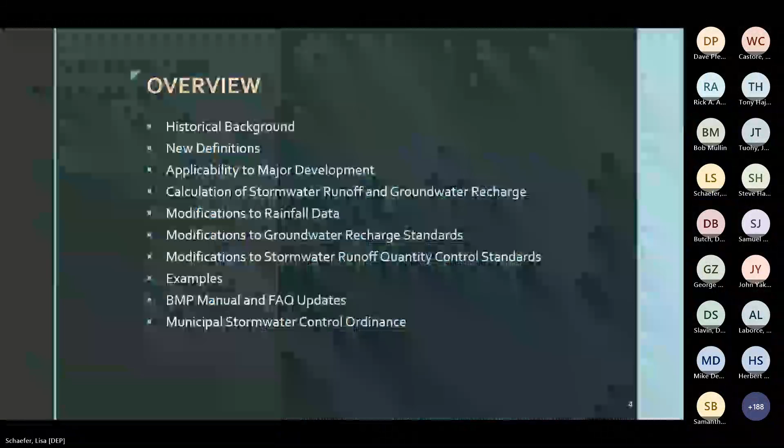First, this presentation will provide some of the history that led to the amendments, then I will cover the two definitions that have been added to the rules, and after that I'll go over the applicability to major development and discuss the legacy provisions, which are those projects subject to the prior rules under certain conditions. The legacy provisions will be followed by the change to the allowable calculation methods.

After that, there will be a longer discussion of the multipliers to be applied to modify NOAA's published rainfall data and how those multipliers are used in the calculations for groundwater recharge and stormwater runoff quantity control. After that will be some examples.

I will also briefly review the other updates that have been made to the BMP manual, the FAQs, and the Municipal Stormwater Control Ordinance, which we abbreviate as SCO. Lastly, we'll have a Q&A session before wrapping up.

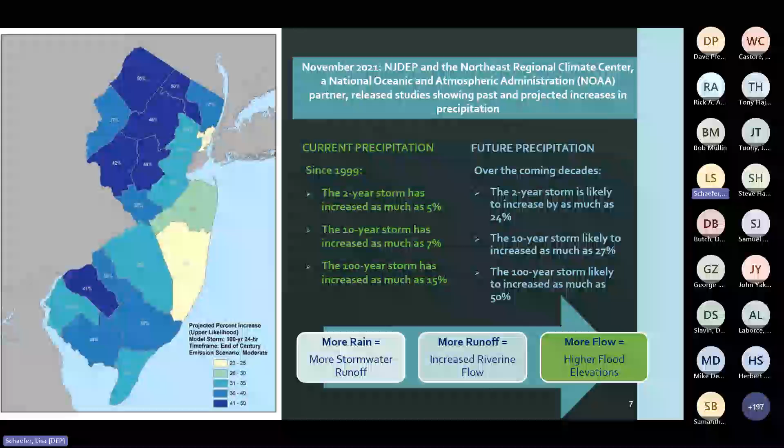The areas with the darkest shading in this graphic are anticipated to have 100-year storms that will increase between 41 and 50% by the end of this century. More rainfall means more runoff, which means larger discharges, and we will also see more flooding as a consequence.

Additionally, global warming increases both the energy in the atmosphere and the potential for more intense storm events. The science predicts that these storms will occur more frequently and at higher intensities than those of the 20th century. I'll cover this a little bit more in a little bit.

In many locations, stormwater runoff is often discharged off-site, and with the increasing intensity and rainfall depth, this will stress our infrastructure, such as bridges, roadways, and stormwater management systems, and will create further problems down gradient of the discharge points. This, in turn, increases risks to the inhabitants and properties.

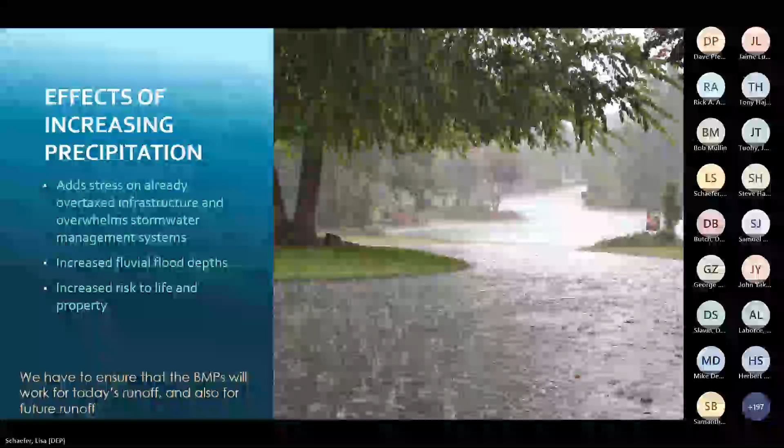Keep in mind, New Jersey is the most densely populated state, and most of the population centers are in the floodplain. So adding climate change on top of worsening flooding is just going to compound the issue and make things unsustainable.

NOAA's rainfall precipitation and intensity data, published in Atlas 14, Volume 2, or on NOAA's Precipitation Frequency Data Server, is essential to stormwater management designs. However, the precipitation depths and intensities were based on data collected from weather stations ending in the year 1999, meaning the design doesn't really reflect the precipitation we're experiencing today. Add to that runoff from older sites where there was no stormwater management, and the impacts worsen, potentially wiping out infrastructure and putting people in danger.

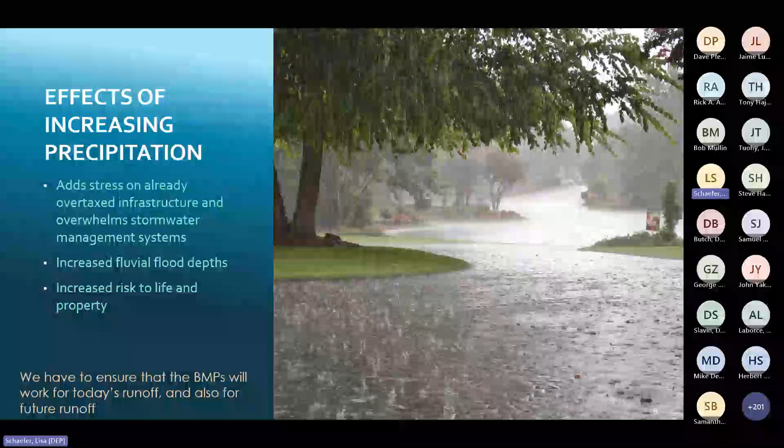Climate change will continue to bring more intensive rain in the future. A stormwater best management practice, or BMP, has a long service life, and BMPs designed in accordance with outdated rainfall data will become insufficient to handle the increasing precipitation depths and intensities. Therefore, there's a real need to anticipate the increase of precipitation depths due to climate change and use the predicted precipitation depths to design stormwater BMPs. The adopted rule amendments are what is required to address those impacts.

In the amended rules, there are two definitions that have been added regarding public transportation projects that are subject to the rules in effect prior to this rule adoption, which will depend upon when the public transportation projects achieved a certain status. First, by public roadway or railroad, we mean a pathway for use by motor vehicles or trains that is intended for public use and is constructed by or on behalf of a public transportation entity. A public roadway or railroad does not include a roadway or railroad constructed as part of a private development, regardless of whether it is ultimately to be dedicated to and or maintained by a governmental entity.

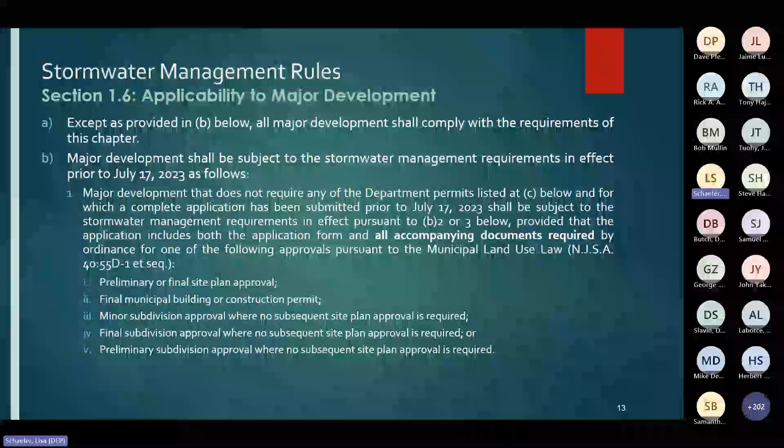Secondly, a major development project that does not require those permits listed in section 1.6C—which are a flood hazard area, freshwater wetlands, a CAFRA, a waterfront development, or a highlands permit from the department—and has submitted an application for the approvals listed in Roman numerals 1 through 5 prior to July 17th of 2023, will not be subject to this rule adoption.

A complete application means that the application submitted to the municipality has all of the required documents specified in the municipality's ordinance, and the municipality's reviewer considers the application complete for the review of the stormwater management design. Take note that the application and all accompanying documents shall include the documents for stormwater management. If the application submitted to the municipality for those approvals did not include the design documents for stormwater management, the legacy provision here will not be applicable.

Item 2 in this section establishes the timeframe for projects subject to the rules in effect on March 1st of 2021, provided it included all required materials I just discussed. Similarly, item 3 applies, except the rules are those in effect on March 2nd of 2021, the GI rules, and projects are also subject to the same conditions regarding items submitted.

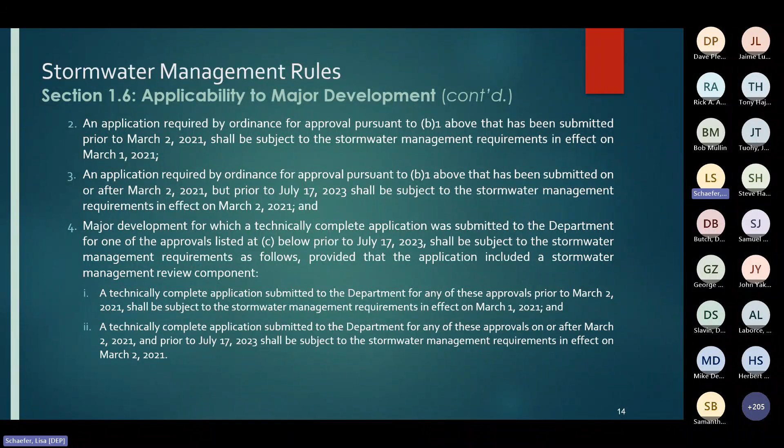Exemptions expire with the expiration, termination, or other loss of duration or effect of either the qualifying local approval or department permit, whichever comes first. The expiration of local approvals under B1 on the previous slide shall be governed by local ordinance. In the event there are multiple qualifying department permits under C, which I read previously, the expiration date is governed by that permit which expires last, provided that the permit is still in effect.

Once the exemption expires, the major development shall be subject to all requirements of this chapter upon reapplication for that permit, and all subsequent permits or local approvals under the municipal land use law. And there's one more citation for limits on these exemptions.

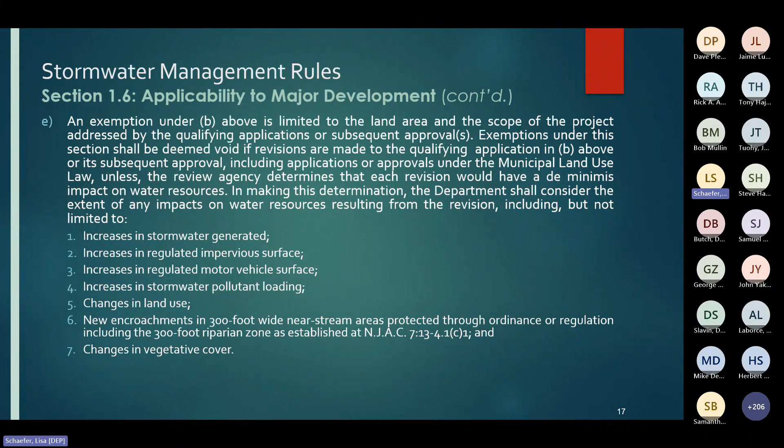An additional legacy provision exists for certain public roadway and railroad projects and is found at NJAC 7:8 under 1.6F. Public transportation entities must demonstrate that the project has determined a preferred alternative or has reached an equivalent milestone prior to rule adoption. The logic is that these projects have already undergone a significant level of planning and design, such that revising the project now to meet the rules would be a waste of public funds.

So next are 4 examples to help clarify the applicability portion of the rule adoption. To start off, I have 2 examples for projects where a department permit is required. For example, number 1, a non-residential major development submits an application for the department's Flood Hazard Area Control Act permit with the stormwater review component on August 1st of 2023 and is deemed technically complete.

The non-residential major development also submits an application to the township for a preliminary site plan approval on August 1st of that year, but the township's stormwater control ordinance is still in alignment with the rules in effect prior to the July 17th, 2023 amendments. What rules and SCO are applicable to this non-residential major development?

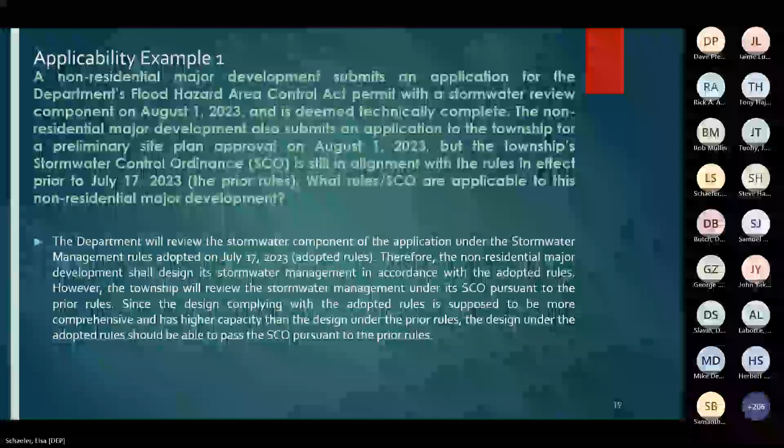Well, the department will review the stormwater component of the application under the adopted rules. Therefore, the non-residential major development shall design its stormwater management in accordance with the adopted rules. However, the township will review the stormwater management under its SCO pursuant to the prior rules. Since the design complying with the adopted rules is supposed to be more comprehensive and has a higher capacity than the design under the prior rules, the design under the adopted rules should be able to pass the SCO pursuant to the prior rules.

For the second example, a non-residential major development submits an application for the department's flood hazard permit with the stormwater review component on June 1st, 2023, and it too was deemed technically complete. The non-residential major development also submitted an application to the township for a preliminary site plan approval on December 1st of 2023. By this time, the township stormwater control ordinance had been amended to be consistent with the rules adopted on July 17th of 2023. So which rules or SCO are applicable to this non-residential major development?

Well, the department's going to review the stormwater component under the prior rules. However, the non-residential major development will need to redesign its stormwater management to comply with the township's SCO pursuant to the adopted rules.

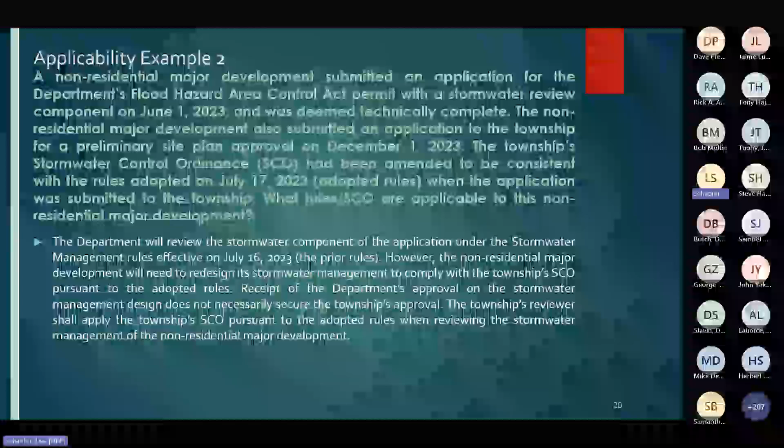Receipt of the department's approval on the stormwater management design does not necessarily secure the township's approval. The township's reviewer shall apply the township's SCO pursuant to the adopted rules when reviewing the stormwater management of the proposed project. So this example is different. In this case, the permit came into the department before the rule adoption, but the project wasn't submitted to the municipality until later that year, and by then the municipality had updated its SCO.

Now, two examples in which a department permit is not required. Example 3: a non-residential major development submits an application to the township for preliminary site plan approval on December 1st of 2023, but the township's SCO is still in alignment with the rules in effect on July 16th of 2023. The project will not require any of the department permits listed under subsection 1.6C in the stormwater management rules. Is the project subject to the amended stormwater management rules?

The township will review the stormwater management under its SCO pursuant to the prior rules, provided the submittal includes all of the required documents prior to the township amending its SCO pursuant to the July 17, 2023 amendments made to the stormwater management rules. So pursuant to the requirements of the MS4 permit, the township must revise its SCO to align with the amended rules and have it be in effect within one year of the rule adoption.

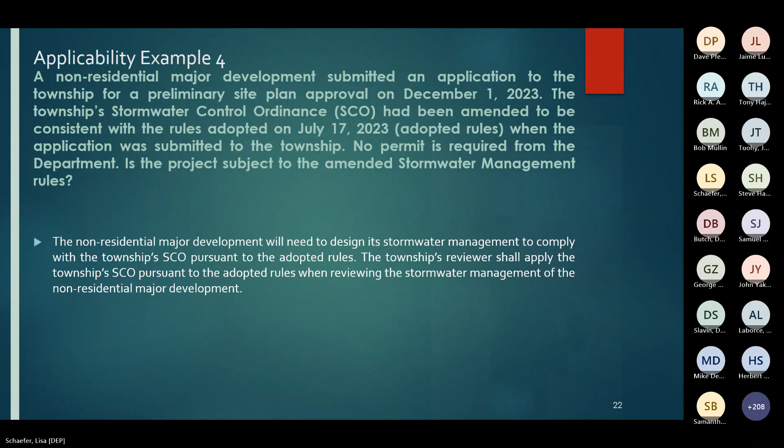Next up is the amendments for subchapter 5, which is the design and performance standards for stormwater management. Going forward, this red stripe is specifically for subchapter 5 of the stormwater management rules. There are no changes to subsections 5.1, 5.2 stormwater management measures for major development, 5.3 green infrastructure standards, 5.5 water quality, 5.8 maintenance, or 5.9 technical sources, but I'm going to handle the remainder of the subchapters out of order, starting with 5.7, the computational methods, as this impacts the remaining subsections I've yet to discuss.

So there is a change in the allowable computation methods, namely only the NRCS methodology is found in the adopted rules. That means the NRCS methodology must be used when calculating the water quality design storm.

Throughout the remainder of this presentation, I'm going to do my best to give you the page in the BMP manual, and this information is included under item 13 on page 32 of chapter 5 in the BMP manual.

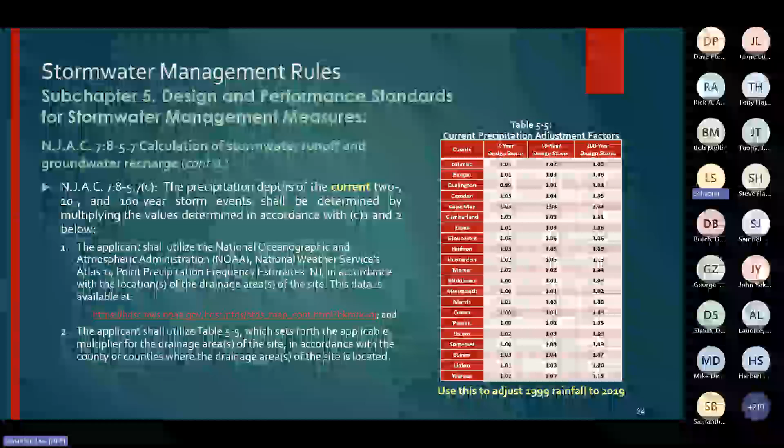The first example I will present illustrates the calculation of the current precipitation rainfall depth for a site. If you aren't familiar with using the NOAA PFDS, start on page 12 of the revised Chapter 5 in the BMP manual published last July.

For a site in more than one county, you multiply the rainfall depth from the first area by the county-specific current precipitation adjustment factor for the design storm you're looking at, then multiply that product by the percentage of the total area lying in that first county. Repeat this for the second area, using the current precipitation adjustment factor for the second county for the same design year storm, then multiply that product by the percentage of the total area located in the second county. Then sum those two to get the current adjusted total rainfall depth for that design storm.

Chapter 5 in the BMP manual has an example, numbered B-1, found on page 18, which depicts a site situated in two counties.

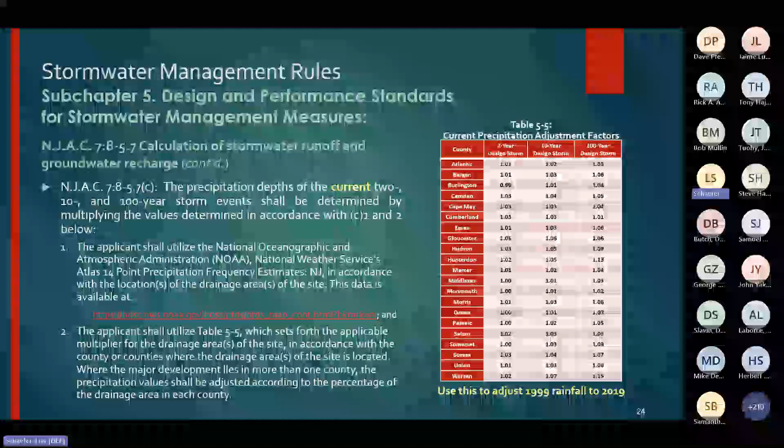I mentioned the PFDS data, but you can also use the county 24-hour rainfall data from the NRCS, and then apply the current precipitation adjustment factor from Table 5-5 in the rules. The county-specific 24-hour rainfall frequency data published by the NRCS in the 2012 Engineering Field Handbook is reprinted as Table 5-1 on page 15 of Chapter 5 in the BMP manual.

There's a second multiplier required in the rule amendments. Applying the future precipitation change factors to the published NOAA rainfall data allows us to look ahead to the period from 2050 through 2099 to address the future impacts of climate change.

The precipitation depth we should use for the projected 2-year storm for the same project located in Warren County is 120% of the depth listed on the NOAA PFDS for the 2-year storm. For the projected 100-year storm in Warren County, the rainfall depth is adjusted to 137% of the 100-year rainfall depth found on the NOAA PFDS.

For a site located in more than one county, it's the same method as before, but using the future projected change factors from this table. You multiply the rainfall depth from the first area by the county-specific future precipitation change factor for the design storm specified, then multiply that product by the percentage of the total area lying within the first county. Repeat this for the second area using the future precipitation change factor for the second county for the same design storm, then sum these products to get the future projected total rainfall depth for that design storm.

Don't worry, I'll have examples. So let's move on.

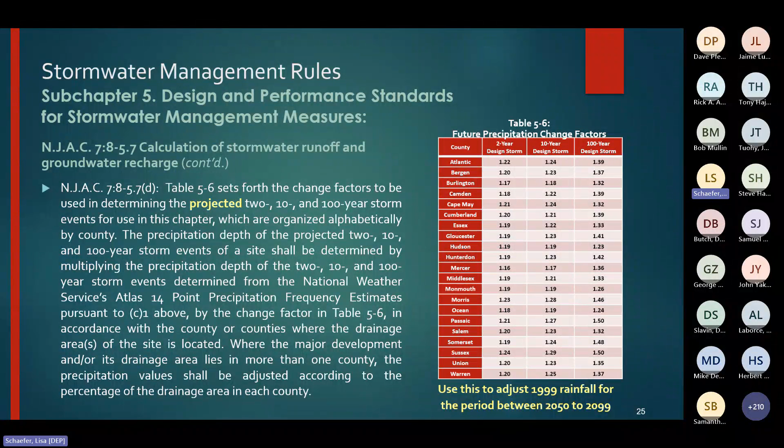We also have to talk about time of concentration calculations, as the equation uses the rainfall depth resulting from the 2-year design storm event. Although how to calculate the travel time of runoff in sheet flow is not explicitly stated in the rules, it's because the rules require using the current and projected 2, 10, and 100-year storm events in the stormwater calculations. The 2-year storm event used in the calculation of travel time of sheet flow shall also use the current and projected 2-year storm events respectively.

Time of concentration for the current storms will use the current rainfall data, meaning you multiply the NOAA rainfall depth for the 2-year storm by the current precipitation adjustment factor. However, for projected storms, multiply the rainfall depth for the 2-year storm by the future precipitation change factor. If you're dealing with very small areas, there won't be much difference, but there will be for larger drainage areas.

One other thing I must mention is that the rainfall depth of the 2-year storm, P sub 2, used in the calculation of the time of concentration for the water quality design storm, is based on using the projected 2-year storm event. It's a lot to remember. All of this information is found on page 25 of Chapter 5 in the revised BMP manual.

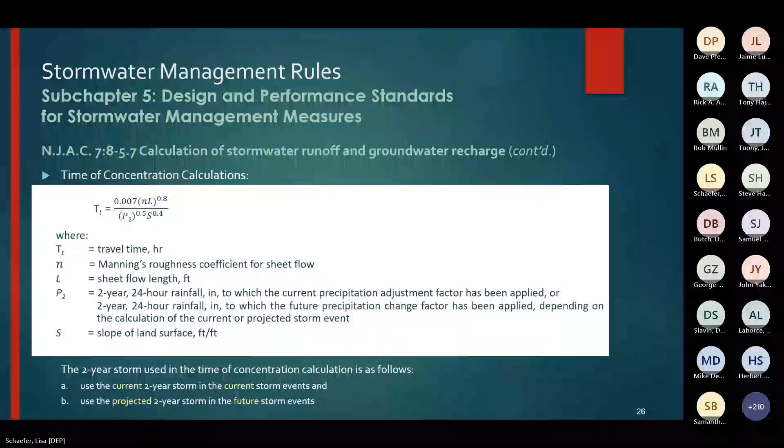Okay, so now that I've explained what the rules mean by a current or projected design storm, we can go back to subchapter 5.4 in the rules. So for groundwater recharge, the rules allow you the option, pursuant to NJAC 7:8-5.4B1 Romanette 1, to address the loss of recharge on an annual basis, and that is done through the use of the groundwater recharge spreadsheet.

Nothing changed for this option. However, if you're going to infiltrate the difference between the pre and post construction runoff volumes, you must do so as required under the second option, using the projected 2-year design storm. Remember, the projected 2-year storm uses the future precipitation change factors found in table 5-6, in the column for the 2-year storm. So, in other words, the design looks at what would happen if nothing on the site changed versus what the site changes are proposed and their impacts at 2019 and in the future.

Okay, for these, you may find that examples 5.6, 5.7, and 5.8 in chapter 5 of the BMP manual are helpful on this subject. One other thing is that chapter 6 of the BMP manual has been updated to match the rule adoption.

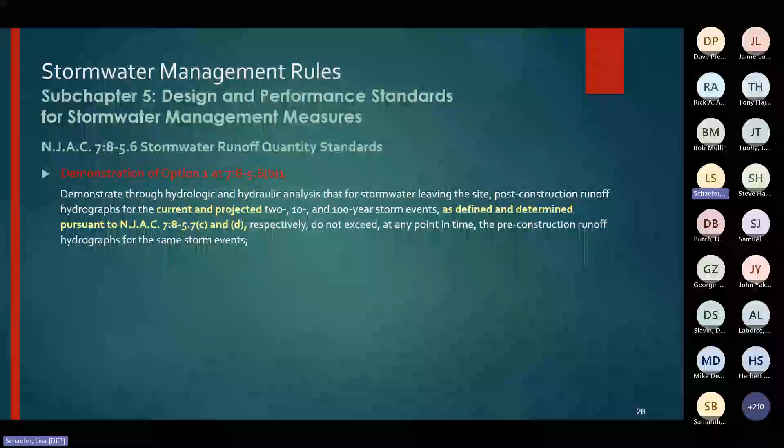Okay, now for the stormwater runoff quantity standards, which are found in subsection 5.6 of the rules. There are 3 options from which to select in order to demonstrate compliance with the requirement to control stormwater runoff quantity impacts. Under the bullet is the rule text for the first option to demonstrate compliance with the stormwater runoff quantity standards. Note that the bold or yellow text is the portion of the rule that has been amended in the adopted rules. Remember, section 5.7C was covered on slide 25 and 5.7D was covered on slide 25 respectively. The bolded text will be discussed after we look at the other options for demonstrating stormwater runoff quantity control compliance.

Okay, so regardless of which option is selected, the quantity control calculations required will have to include an analysis of runoff volumes produced for both the current and the projected design storms. So you will review the pre-construction, aka existing conditions, and what's proposed using the rainfall data to which the current precipitation adjustment factors are applied, to do your comparison using numbers that reflect what was precipitating in 2019. You also have to review the pre-construction conditions and what's proposed using the rainfall data to which the future precipitation change factors are applied, to do your comparison using numbers that will reflect what will be happening from 2050 through 2099. That way, your review checks that the designs work for what's currently precipitating and what we can expect will precipitate due to climate change.

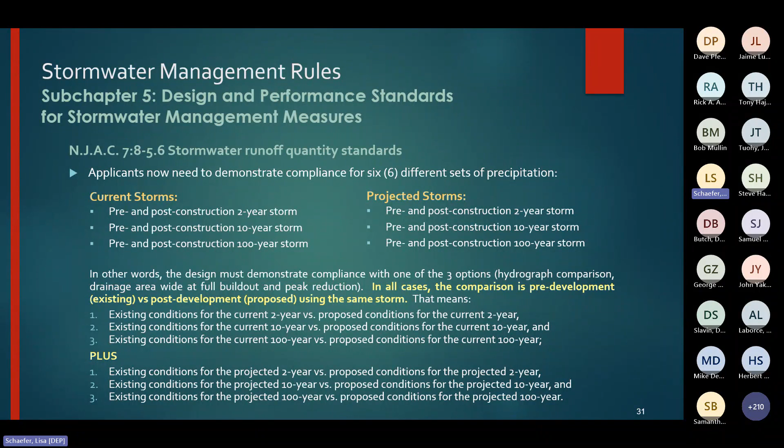If you recall, I covered the time of concentration calculations on slide 26, but they also come into play here. So if you're using modeling software to design or to review the accuracy of designs, you may want to create a model for the projected storms that is separate from the model for the current storms, because of the different rainfall depths. You may also want to look at page 84 in chapter 5 of the BMP manual, which has the updated summary of modeling guidance.

We first go to the website found at the link shown. In the data description section, from the data type drop-down menu, make sure precipitation depth, rather than precipitation intensity, is selected as shown on the left. Similarly, for the time series type, ensure partial duration has been selected from the drop-down menu.

Next, in step B, under the select location option, manually enter the location using one of the options offered on the screen, or use the map to locate the site, making sure to zoom in. We're looking for Trenton Station 2.

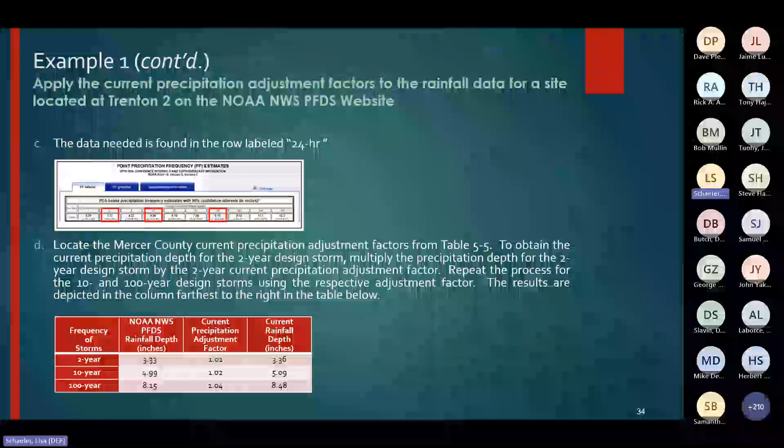Repeat the process for the 10 and 100-year design storms using the proper adjustment factor. That's how you get a 10-year current rainfall depth of 5.09 inches and a 100-year current rainfall depth of 8.48 inches, as depicted in the column farthest to the right in the table.

If you aren't familiar with using the NOAA PFDS, start on page 12 of the revised BMP manual, chapter 5, published last July, for more details.

For the next example, when a site is situated in 2 counties, the method is to obtain the current adjusted rainfall depths for each of the 2 counties and then weight average them based on the area of the site in its respective county. Here the site is located on the county line shared by Middlesex and Mercer counties. 1/3 of the site is in Middlesex and the remaining 2/3 is in Mercer County.

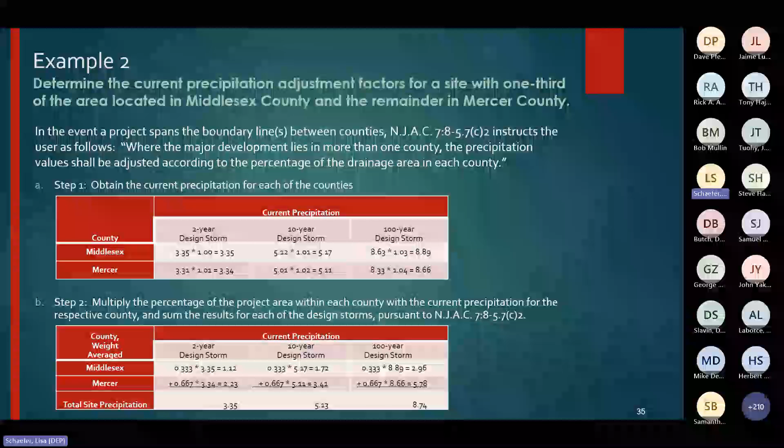In step A, we obtain the NOAA data and the current precipitation adjustment factors and calculate the rainfall depths for each of the design storms for each of the counties. Then, as shown in the second table, we multiply the percentage of the project area within each county by the current precipitation for the respective county from step A, and sum the results for each of the design storms. The final current precipitation depths are in the bottom row of the lower table.

This example provides a scenario showing noncompliance with the requirements when the proposed development reduces the regulated motor vehicle impervious surface and increases the slope of the surface.

Often for redevelopment projects, a designer would choose the option at NJAC 7:8 5.6B1 to demonstrate compliance for quantity control, that for stormwater leaving the site, post-construction runoff hydrographs for the current and projected 2, 10, and 100-year storm events, as defined and determined pursuant to NJAC 7:8 5.7C and D respectively, do not exceed at any point in time the pre-construction runoff hydrographs for the same storm events.

For a site located in Trenton, which is Mercer County, an approximately 2-acre paved parking lot is to be redeveloped as an office complex consisting of a new building, a parking lot, and landscaping. The existing lot has a slope of 1%. The redeveloped site will be regraded to a 5% slope for better drainage. The landscaped area will not receive runoff from the impervious surfaces. Hydrologic soil group C soils are present.

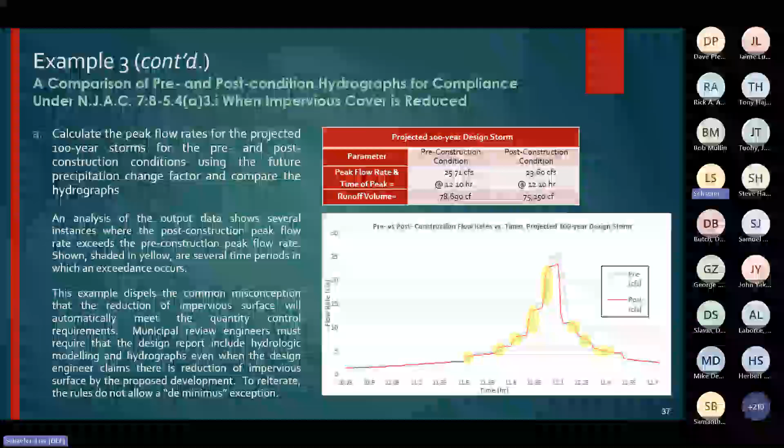A summary of the results from the modeling software is shown in the table. To correctly calculate the time of concentration, first P sub 2 was calculated by multiplying the NOAA rainfall depth for the 2-year storm of 3.3 inches with the future precipitation change factor of 1.16 for Mercer County, and P2 is found to be equal to 3.86 inches.

Here in the table is the summary information, and it looks like the results for the post-construction condition are less than that for the pre-construction values.

Next, the modeling software produces hydrographs with the peak flow rates and time intervals exported as data for input into a spreadsheet to create a chart.

Although it's not shown here, at first glance the hydrographs seem to show compliance, meaning the post-construction volume looks like it is less than that for the pre-construction condition.

We would think that the post-construction hydrograph would be completely under the pre-construction hydrograph. However, when we look at the data, we find that this is not the case.

A zoomed-in view of the pre- and post-condition hydrographs are provided on the slide. So even a reduction in impervious cover should be reviewed to check that adjustment or change factors have been correctly applied to the appropriate storm calculations, and the data itself examined instead of the hydrographs, to confirm that there are no exceedances. You would similarly inspect the data for the other projected and all of the current design storms to look for other instances where the post-development hydrograph exceeds the pre-development hydrograph.

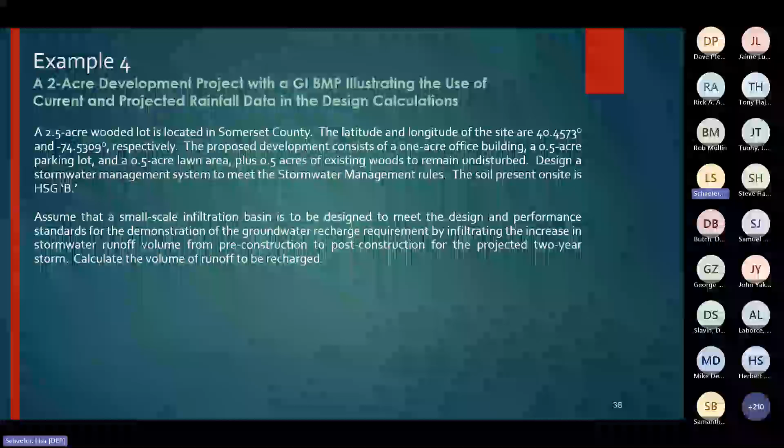This example provides a scenario showing the groundwater recharge calculations. Here, a 2.5 acre wooded lot is located in Somerset County. The latitude and longitude of the site are 40.4573 degrees and negative 74.5309 degrees respectively. The proposed development consists of a 1 acre office building, a half acre parking lot, and a half acre lawn area, plus half an acre of existing woods to remain undisturbed.

We're going to design a stormwater management system to meet the stormwater management rules. The soil present on site is HSG B. So we're going to assume that a small-scale infiltration basin is to be designed to meet the design and performance standards for the demonstration of the groundwater recharge requirement, by infiltrating the increase in the stormwater runoff from pre-construction to post-construction for the projected 2-year storm, and we're going to calculate the volume of runoff to be recharged.

I'm going to skip the parts of the design calculations because I just want to focus on the groundwater recharge requirement. So for this site, I've included the NOAA rainfall depth, the future precipitation change factor for Somerset County, and the depth of precipitation for the projected 2-year design storm.

With a precipitation depth of 3.93 inches, the projected 2-year design storm will produce an increase in runoff volume for the post-construction condition, which is 17,886 cubic feet, as shown in the lower table. To comply with the rule requirement, this is the target that the design must achieve, provided everything else is designed in accordance with the BMP manual.

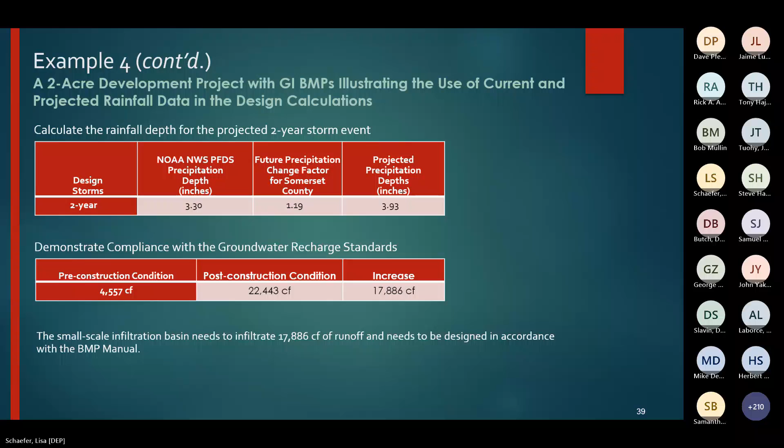The fifth example is sizing a manufactured treatment device using the NRCS methodology, since we can no longer use the rational method and modified rational method for stormwater calculations. This example will walk you through what is now required.

We're going to calculate the peak flow rate for sizing an MTD to treat the water quality design storm from a quarter acre impervious motor vehicle surface. The parameters that apply are we have an area of a quarter acre. Our slope is 5%. We use a CN value of 98 since it is 100% impervious.

We've determined that our projected 2-year rainfall depth is 3.84 inches. And we also need to note that the hydraulically most distant point to the inlet of the MTD for our site is 110 feet.

When using the NRCS methodology, you need to calculate the time of concentration, for which we follow the method covered in example 5-1 of chapter 5 in the BMP manual. That example begins on page 33, and it's also the formula stated on slide 27.

As I said earlier, we use P2 for the projected 2-year storm in the TC calculation that we use for our water quality design storm. However, there won't be much difference if we mistakenly use the current 2-year storm for P2, given that we're only dealing with a drainage area of a quarter acre.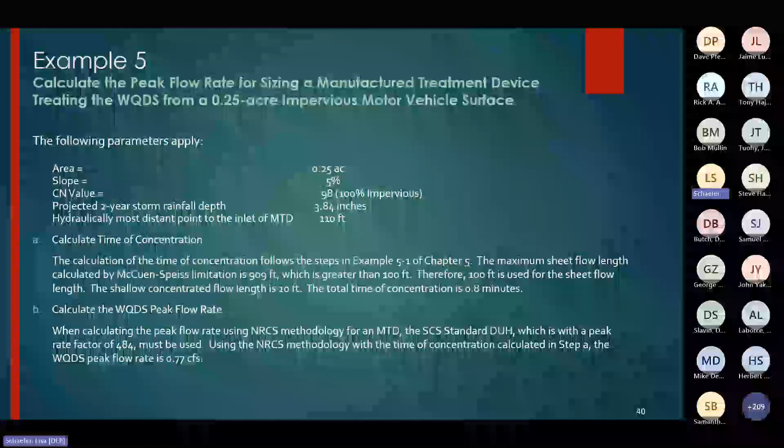However, the maximum sheet flow length should not exceed whichever is shorter, meaning the 100 foot limitation or the McCuen-Speiss value. So we use 100 feet, since 909 is way too long.

For our stated flow path length of 110 feet, we have 100 feet as sheet flow, which leaves 10 feet of shallow concentrated flow. Plugging that all in, T sub C is calculated to be 0.8 minutes.

We also have to use the SCS Standard Dimensionless Unit Hydrograph with a peak rate factor of 484. This is covered on page 27 of Chapter 5 of the BMP manual. With all of this together, the modeling software calculates that the peak flow rate for the water quality design storm is 0.77 cubic feet per second.

The next thing to do is determine the size of the MTD. The selection of a specific MTD model listed on our webpage is based on the maximum treatment flow rate, or MTFR, for a hydrodynamic type MTD, or the maximum allowable drainage area evaluation method and the MTFR evaluation method per the certification letter for a filtration type MTD.

Go to chapter 9.5 for green infrastructure MTDs, and go to chapter 11.3 for MTDs that are not certified as green infrastructure for this calculation.

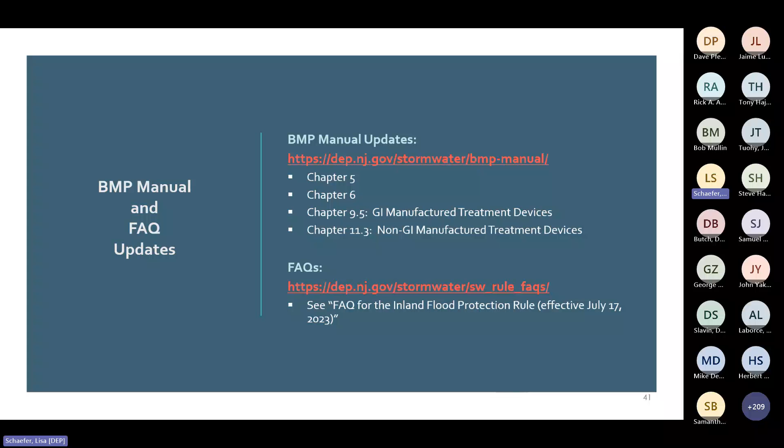The FAQs have been expanded to address various issues, some of which have been mentioned on the earlier slides. The newest FAQs are at the bottom of the web page, above the blue footer. Just look for the rule adoption date and click on a question, and it will expand to show the answer.

Now, the updates to the Stormwater Control Ordinance align with the rule adoption. They can be downloaded from our website in Word or PDF formats.

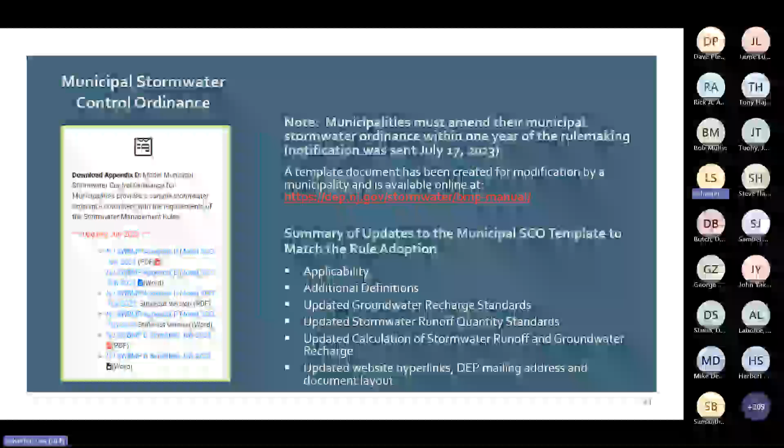On the left is a screenshot from the updated website showing all of the different types of items available to download. There's a clean copy, plus there's a strike-through version to illustrate where text has been removed, and for those, the new text appears in red.

And then there's the simplified version, which just cites subchapter and section numbers from the stormwater management rules instead of the full text, to reduce or eliminate the need for municipalities to revise their ordinance when the stormwater management rules are amended. A municipality has to comply with the applicable laws and procedures for passage and adoption of ordinances pursuant to this simplified version.

Reminder: municipalities must amend their stormwater control ordinance within 12 months of written notification by the department of the need for modification and update. Notification was sent on July 17th of 2023, and as I said before, we're getting pretty close to that deadline.

On the lower part of the slide is a summary of the updates made to the SCO that match with the rule adoption, just so you can tick them off in your mind. We've also updated the hyperlinks throughout the documents and cleaned up their appearance.

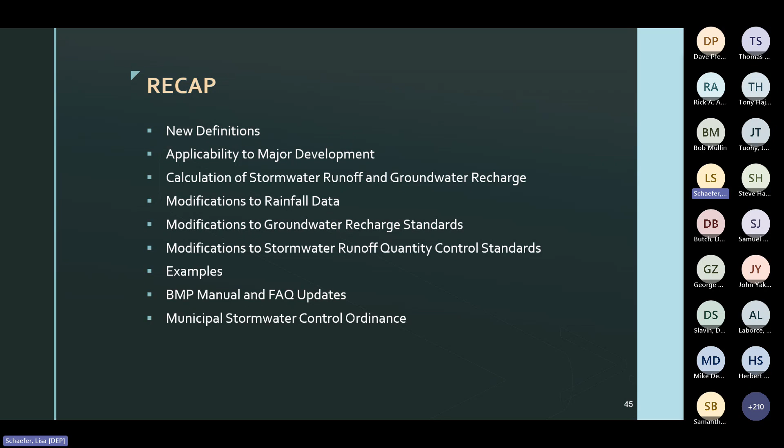Please continue to periodically check our website for updates to the manual and other stormwater related material. If you're not seeing the July 2023 date on the page or something more current, you need to refresh your browser.

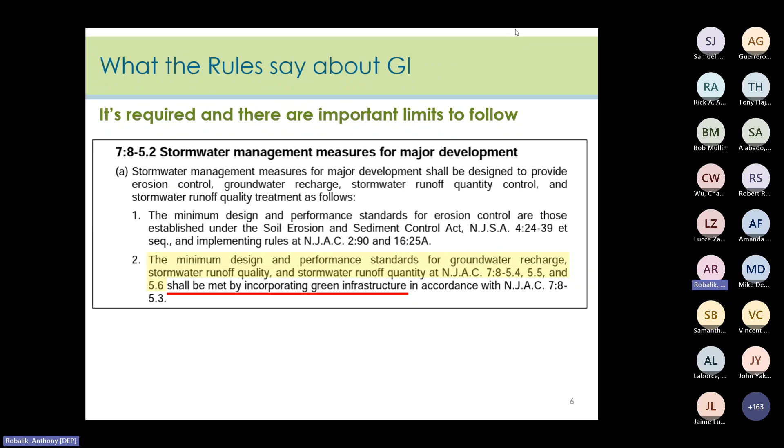BMPs listed under Table 1 are identified as GI. Table 2 is GI, requiring a waiver or variance if used for other than quantity control. Table 3 are non-GI BMPs. But this is just a review of what was covered back in Module 1 in the overview presentation. The tables also have important notes and footnotes that should not be overlooked, and if you need help understanding them, please feel free to contact us.

So the takeaway from this is that the rules require a project to meet the design and performance standards using GI, meaning usually Table 1 BMPs will be used as they satisfy all of the requirements. But Table 2 BMPs, as covered earlier, can be used to address stormwater runoff quantity control, and when used for the other design and performance standards, Table 2 BMPs require a waiver or variance. Table 3 BMPs are not considered GI, and therefore will require a waiver or variance to meet any of the design and performance standards.

Okay, so what is meant by a contributory drainage area? Subchapter 5.3 is where the rules identify which of the GI BMPs have fixed contributory drainage area limits. A contributory drainage area is defined in the rules as the area that drains to a stormwater management measure, excluding the area of the measure itself.

So on the fact sheet below the first paragraph on page 1, these limits are restated. Take note that the GI BMPs found in Chapter 9 of the BMP manual are not listed here, as they have one or more design components that limit the size of the contributory drainage area. For example, grass swales have size constraints and a maximum depth of flow limitation of 2 inches, and this design criteria will impact how much area can drain to a given grass swale.

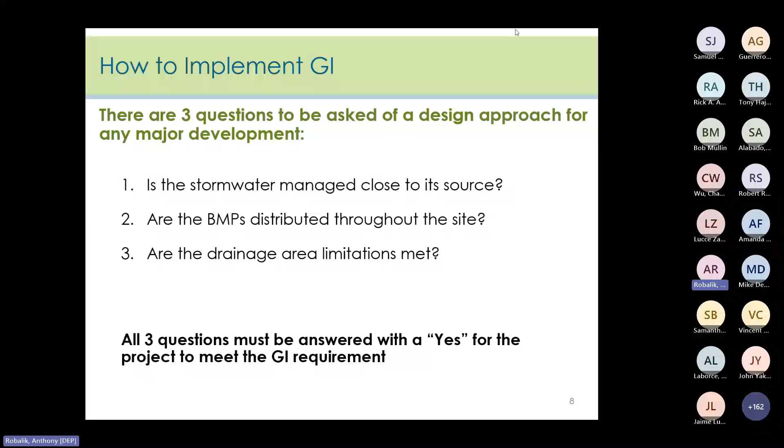That is, stormwater must be managed close to its source, the BMPs used must be distributed throughout the site, and any BMP drainage area limitation must be met, and the reviewer will confirm that the answers to all 3 of these questions are correct. So let's go through these questions individually.

So this is an example of placing BMPs close to the source of runoff. And here's the project description. We have a fully impervious 3-acre site in an urban redevelopment area, and it's proposed to be redeveloped again.

However, due to the proposed GI practices, the project breaks up or disconnects the flow of runoff over impervious surfaces and provides low maintenance landscaping that encourages retention and planting of native vegetation that minimizes the use of lawns, fertilizers, and pesticides. So in this example, all stormwater runoff generated by the redevelopment is managed close to its source. So we can answer with a yes to that first question on the GI fact sheet.

So the next question to be asked is if the GI BMPs are dispersed throughout the site. The previous site was certainly a good example of spreading BMPs throughout the site, and this is another one. The parking stalls shown here are actually pervious pavement, and they are separated by traditional impervious pavement aisles graded to direct runoff to the pervious areas.

Roof runoff also drains to the subsurface storage beds below the pervious pavement parking stalls at either end without exceeding the drainage area limits. And so we can answer yes for this site as well.

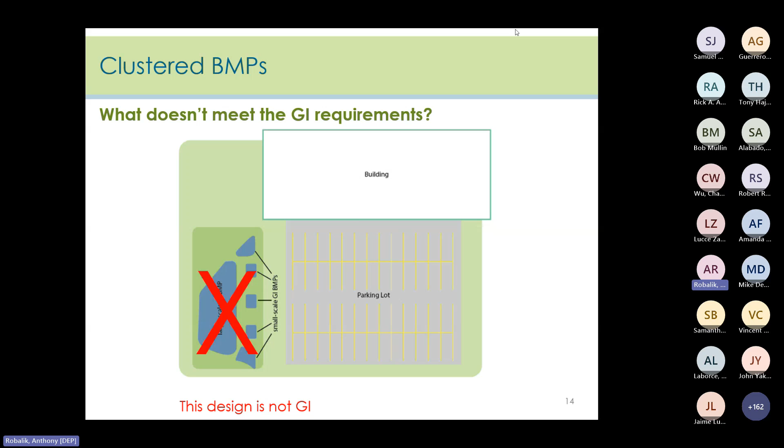Okay, and the last question to be asked is whether the contributory drainage area of the proposed GI BMP is less than or equal to the limitation found in the rules at 7:8-5.3.

Small scale bioretention basins are ideal for use in parking lot islands and where grass strips at the edges of parking areas or roadways were typically used in the past. The drainage area limit for a small scale bioretention basin is 2.5 acres, which generally is more than enough.

All right, so with that, that's going to conclude our GI fact sheet portion of the presentation. Next, we're going to be reviewing a plan review example that focuses on using green infrastructure.

The goals of this part of the presentation are listed here. However, we will focus on green infrastructure. For this example, we'll look at what was proposed and identify if and where the design falls short.

All reviews require figuring out which standards apply and then checking them for compliance. Questions we must ask and answer are: what is the disturbance on site? Does it trigger major development? Will the project be required to do water quantity, groundwater recharge, water quality? And are there infiltrating BMPs being proposed, which would require groundwater mounding?

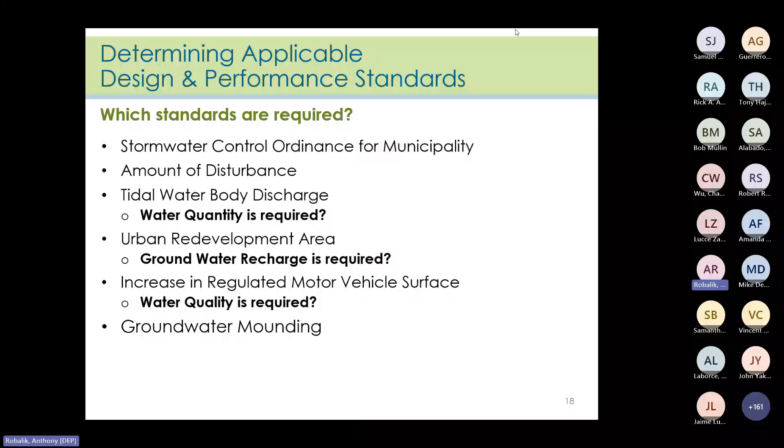We will need to figure out all of that to see if they will apply in this review and how they will be addressed using green infrastructure. So it's important to know what the site looks like, what the pre-construction conditions are, and what the existing land cover is. Plus, we need to take a look at soil testing information.

Let's take a look at what's going on in our example. The property in question is a farm that had been such for a number of decades. The site is over 18 acres. The road running east to west at the front of the property is a county route with sizable traffic volumes. The property is adjacent to some forested properties along the back lot line, which is also a stream corridor.

And the property drains towards the stream, which flows to the south before crossing under a roadway east of the property via a culvert.

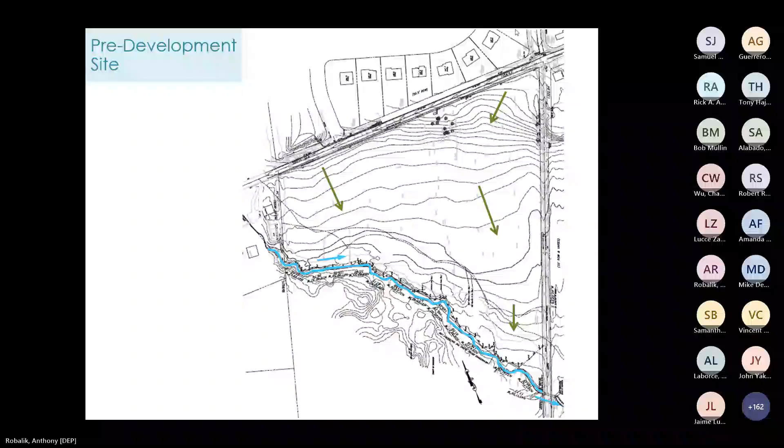The proposed development includes the clearing and grading of the property, construction of 25 single-family homes, widening of the existing road found on the right side of the plan, and adding another internal road. Both roadways will be constructed with 6-inch curbs and will each end in a cul-de-sac.

The stormwater management report indicated 4.7 acres of impervious cover is proposed, without a breakdown into which is motor vehicle surface and which is rooftop surface. And that breakdown is important with the current rule.

So we can start by checking the coverages. Each of the homes is about 0.35 acres on average, which totals to 8.75 acres in total. The proposed roadways are 28 feet in width, ending in a 50-foot radius cul-de-sac.

So that ends up being roughly 70,000 square feet, or 1.6 acres, of new motor vehicle surface proposed. Additionally, the existing portion of the roadway along the east side of the property will be newly collected where no collection system existed before, so it also counts towards that net increase in motor vehicle surface. We can safely say that these totals exceed the threshold for major development, and so this is a major development.

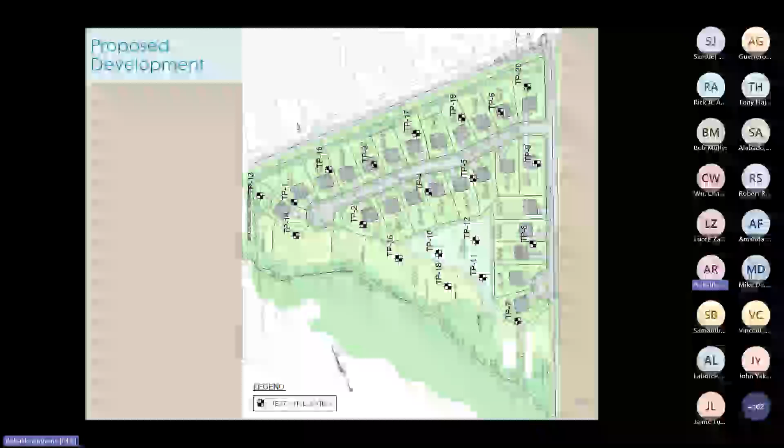First, let's look at the soil exploration map, which indicates that a number of test pits were completed. Although at the time this plan was prepared, only one central stormwater management basin was anticipated, as shown in the center of the site, and that's probably due to the preliminary concept predating the current stormwater management rules.

As we know, major development projects are required to use green infrastructure best management practices, which are smaller in scale and treat stormwater runoff close to the source. So it's good that the designers realized the single basin approach wasn't compliant and went with multiple BMPs.

The reviewer would also want to check that for the revised design, the proper number of test pits and soil borings were performed. In this case, the soil testing report was not revised to meet the testing location requirements for the updated basin layout.

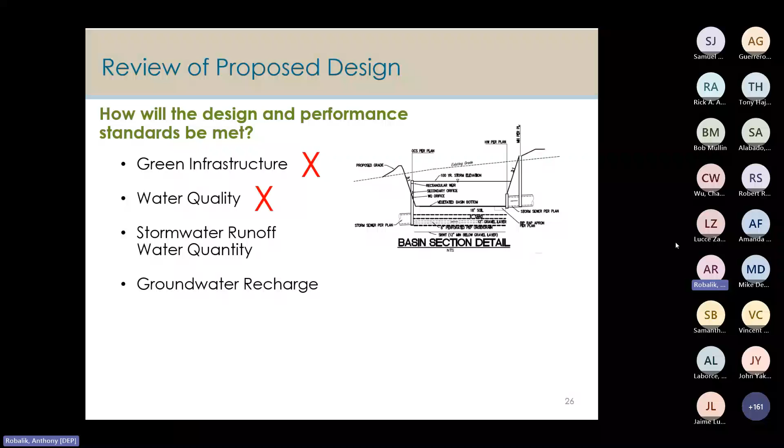Next point, the stormwater calculations prepared in 2022 used the Type III rainfall distribution for the 2, 10, and 100-year design storms. As per the 2021 publication in Chapter 5, the NOAA C or D distribution should have been used. So that will also go into the review letter, and new calculations would be required. This site, as is, would not meet the runoff quantity control standard until that correction is made.

For groundwater recharge, the report states that the project demonstrates compliance with subsection 5.4 of the rules because all of the runoff is collected and infiltrated. That statement is false with respect to the current design. It may have been true for an earlier iteration of the design.

So the project will have to be revised along with the narrative, and also no further detail is provided in the report on meeting the groundwater recharge requirement. Another thing to add to the review letter is a reminder that if the design were actually infiltrating runoff into the underlying soils, then a groundwater mounding analysis would also have to be included.

So in summary, this presentation covered what is meant by green infrastructure, or GI, which I'll state again here, is a stormwater management measure that manages stormwater close to its source by either treating stormwater runoff through infiltration into subsoil, treating stormwater runoff through filtration by vegetation or soil, or storing stormwater for reuse. The fact sheet was created to help the public better understand GI and how to implement it, along with examples of situations that are considered as not meeting the definition of green infrastructure.

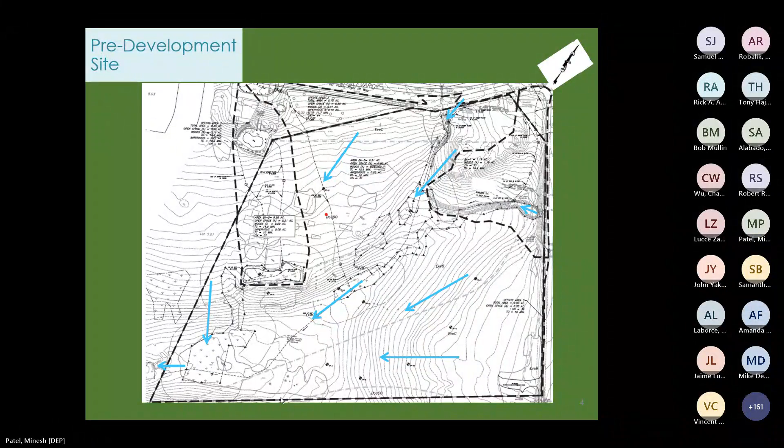The proposed development includes the clearing and grading of the property. There will be construction of 152 age-restricted affordable housing units in a single multi-story building, a single access driveway, surface level parking, and multiple stormwater basins that will discharge to the southwest corner of the property to support the existing drainage patterns.

The project will be constructed in 2 phases. The first will include 84 units, and the second will be 68 units, which are located on the left side of the building as shown.

From the stormwater management report, the narrative states there are 3 small-scale infiltration basins along the southern border that are designed to provide extended detention of the larger design storms, plus a northeast detention basin for the off-site runoff entering the site to the north and the east.

Immediately, there is a big issue with this design. All 3 of the basins that are proposed to meet the GI requirement are grouped at the southern side of the project. So clustering these BMPs together is not compliant with the GI requirements. Remember, the BMPs have to be distributed throughout the site and manage stormwater close to its source.

The brown shaded rectangles denote results for other test pits. For test pits number 3 and number 5, groundwater was encountered at 5.5 feet below existing grade. For test pit number 6, groundwater was found at 6 feet below grade. And lastly, a perched water table was found for test pit number 8 at 8 feet below grade. As with the blue shaded test pits, groundwater was not encountered at the ones I did not call out.

But the report shows quite a variation in the test results for permeability. So let's look at the table of the testing results.

Here's that table, and I've circled the locations where the field tested permeabilities were less than an inch per hour. Unless soil replacement is proposed, these locations really aren't suitable for infiltration BMPs. Given the low permeabilities at the encircled test pits, we will have a problem with the ability of the orange and yellow shaded basins to drain properly. We'll add this to the review letter.

Next, let's look at information found in the stormwater report, which states the 3 basins are designed as small-scale infiltration basins, but we do have to check if they really are.

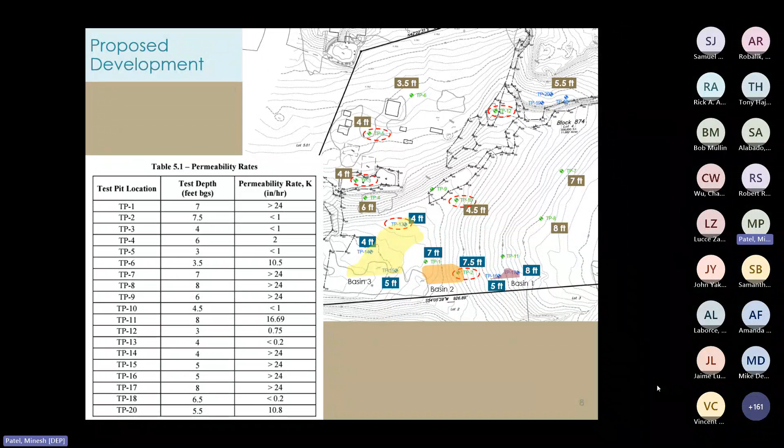The node report shows basin 1 drains to basin 2, which then drains to basin 3, such that the contributory drainage areas appear to exceed the 2.5 acre limitation established in the rules and in the GI fact sheet. The connections between BMPs is something that has to be checked to determine if this is true. Remember from the fact sheet presentation that the GI BMPs have to function individually for the water quality and groundwater recharge design storms, and each has to meet the contributory drainage area limitation. Perhaps the drainage area map can provide clarification, and after that we'll look at the construction details to see how this design will actually function.

And that will have the outlet structure B11. If you look at this detail, the lowest orifice has an invert of 50, which is below the water surface elevation of the water quality design storm that's contributory to basin 2. So basin 2 wouldn't meet the design criteria for infiltration basins according to our BMP manual.

And similarly, the lowest orifice at OCS-10 is below the water surface elevation of the water quality design storm.

In conclusion, basins 2 and 3 do not meet the design criteria for infiltration basins according to the BMP manual, and would not merit the 80% TSS removal rating. These contributory drainage areas would most likely be larger than the ones found in Table 5-1. They'd probably be more suited for those in Table 5-2, which would require a variance before they can be used for quality and recharge.

Waivers are for the enlargement of an existing public roadway or railroad, or the construction or expansion of a public pedestrian access, which this project was not. The next slide will revisit the subject of variances.

There are strict standards to be met in order to grant a variance. More specifically, the municipality has to have a mitigation plan in place that identifies what measures are necessary, potential mitigation projects, and/or criteria to evaluate mitigation projects that can be used to offset the deficit created by granting a variance. Additionally, the conditions shown here in part from the rules must be met.

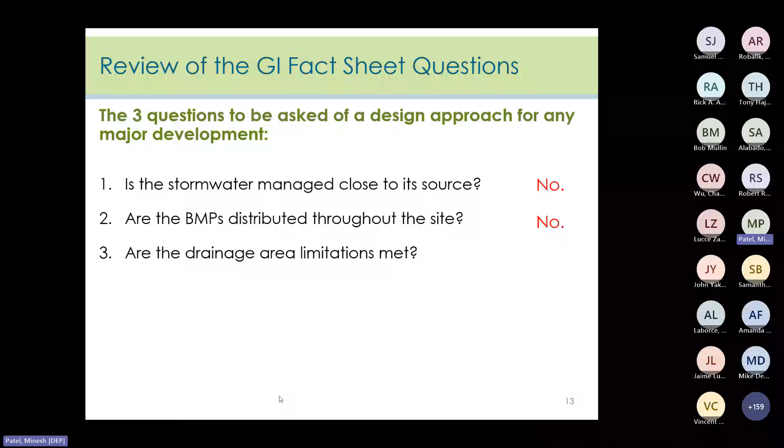So to wrap things up, this project does not comply with the requirements to use green infrastructure to meet the design and performance standards for water quality, groundwater recharge, and stormwater runoff quantity control.

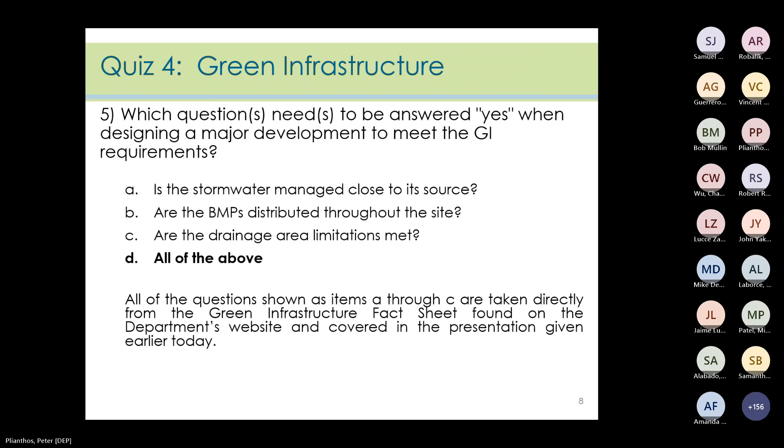Number 6. Which of the following GI BMPs has a contributory drainage area limit that is other than 2.5 acres? The correct answer is dry wells. Dry wells have a 1 acre contributory drainage area limit per 7:8 5.3b. This information was also in the slides from the GI fact sheet presentation.

Number 7. Unless a variance is granted, which of the following BMPs cannot be used to meet the quantity control requirement? The answer is extended detention basins from chapter 11.2 of the BMP manual. In accordance with NJAC 7:8 5.2, extended detention basins cannot be used unless a variance is granted. The presentation for example 3, specifically slide 12, included the information on what must be in place for a municipality to grant a variance from the GI requirements.

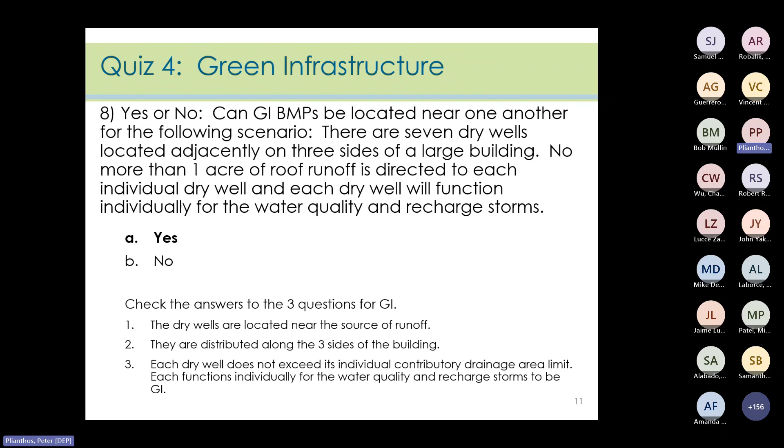The answer to that is yes. This material is covered on slide 13 of the GI fact sheet presentation from earlier today, and you can find more information about this setup on the GI fact sheet itself. The important factor here is making sure the answers to the 3 questions for GI are yes.

Number 9, which of the following is recognized as a co-benefit of using green infrastructure? The correct answer is D, all of the above.

As described on pages 1 and 2 of the green infrastructure fact sheet, all 3 of these are environmental, social, and economic co-benefits of using green infrastructure. Additional co-benefits include increased property values and the removal of pollutants from the air through greater utilization of vegetation.

Number 10, yes or no? Is the interconnection between GI BMPs and the following scenario acceptable?

A small-scale bioretention system infiltrates runoff for the water quality and groundwater recharge storm events, meeting the 2.5-acre contributory drainage area limitation. The 2, 10, and 100-year storm events are discharged from the small-scale bioretention system to a large-scale infiltration basin, which is used only for water quantity.

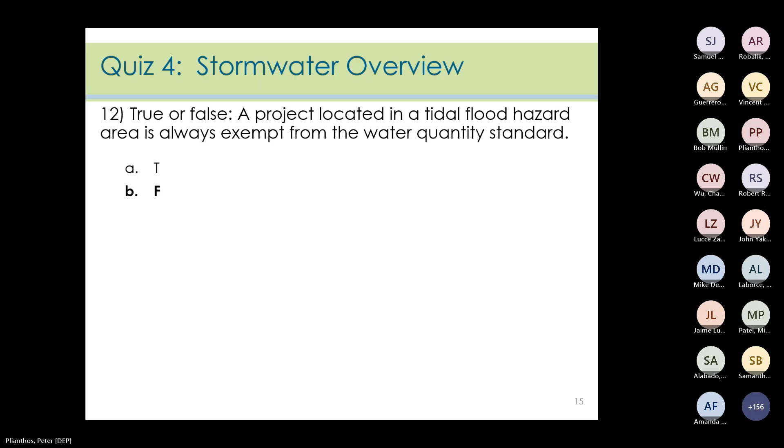Number 12, true or false? A project located in a tidal flood hazard area is always exempt from the water quantity standard. This statement is false.

In tidal flood hazard areas, the water quantity standard does not apply only if the applicant can demonstrate that the increased volume of stormwater runoff will not increase flood damage below the point of discharge.

In tidal flood hazard areas, stormwater runoff quantity analysis is required unless the design engineer demonstrates through hydrologic and hydraulic analysis that the increased volume, change in timing, or increased rate of stormwater runoff, or any combination of the three, will not result in additional flood damage below the point of discharge of the major development.

Also, no analysis is required if the stormwater is discharged directly into any ocean, bay, inlet, or the reach of any watercourse between its confluence with an ocean, bay, or inlet, and downstream of the first water control structure.

Number 13, yes or no? Can the Delmarva dimensionless unit hydrograph be used for the redevelopment of a 2-acre entirely impervious site located within the coastal plain? The answer is no.

The Delmarva dimensionless unit hydrograph must be used when modeling watersheds within the coastal plain region of New Jersey, with just a few exceptions. It cannot be used to size a manufactured treatment device or MTD, as it may underestimate the peak flow rate entering the MTD.

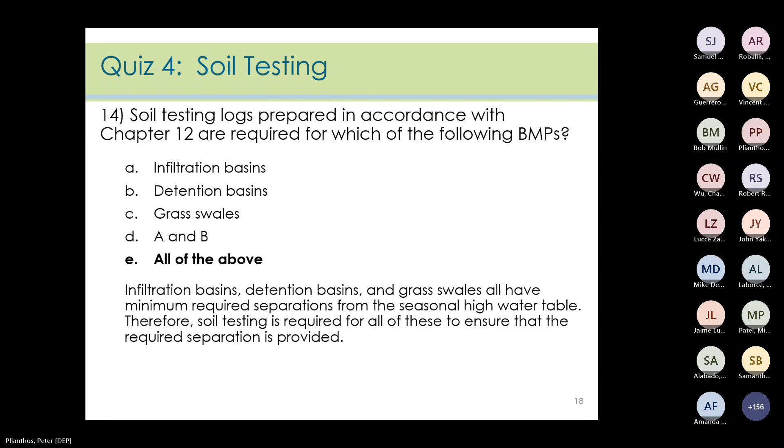Number 15, which of the following would be exempt from the groundwater recharge standard? The correct answer is B, previously developed portions of a site in a designated area.

Number 16: which of the following conditions must be met when a stormwater BMP is allowed to infiltrate the entire runoff from the 2, 10, or 100-year storm? The correct answer is all of the above.

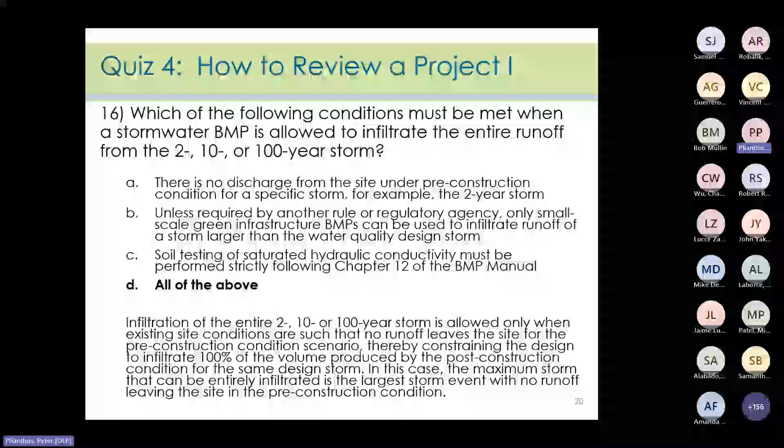Infiltration of the entire 2, 10, or 100-year storm is only allowed when existing site conditions are such that no runoff leaves the site for the pre-construction condition scenario, thereby constraining the design to infiltrate 100% of the volume produced by the post-construction condition for the same design storm. The maximum storm that can be entirely infiltrated is the largest storm event with no runoff leaving the site in the pre-construction condition. For example, if there's no runoff for the pre-construction 10-year storm, but there is for the 100-year storm, then for the proposed condition, the maximum design storm that can be fully infiltrated is the 10-year storm.

The answers for B and C paraphrase what is found in the rules. Only small-scale GI BMPs can be used to infiltrate runoff of a storm larger than the water quality design storm, unless required by another rule or agency. And soil testing of saturated hydraulic conductivity must be performed strictly following Chapter 12 of the BMP Manual.

Number 17: under the rules adopted July 17, 2023, which of the following meets the groundwater recharge requirements? A and C are the correct answers.

The rules adopted on July 17, 2023 allow two options to meet this requirement. One is maintaining 100% of the average annual pre-construction groundwater recharge volume for the site. That option of meeting the requirement hasn't changed under the amended rules. The second option is to infiltrate the increase of stormwater runoff from pre-construction to post-construction for the climate change projected 2-year storm. So the change under the newly adopted rules is that the storm event used under this option is the projected 2-year storm.

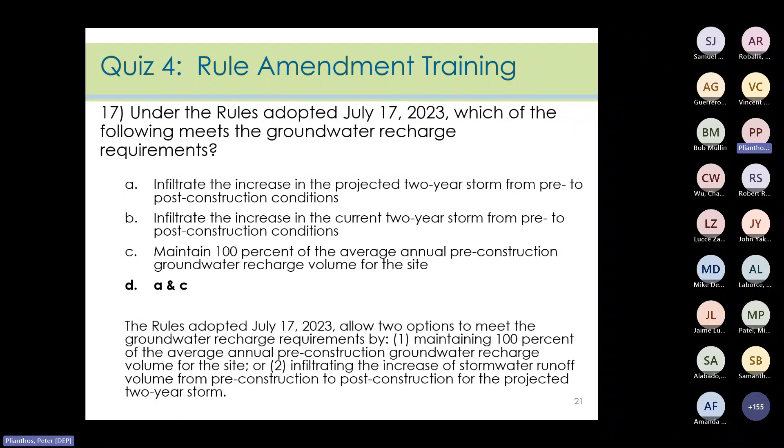Number 18, true or false? Under the rules adopted July 17, 2023, the storm events used to meet the stormwater quantity standards shall consist of the current and projected 2, 10, and 100-year storm events, as defined and determined pursuant to NJAC 7:8, 5.7, C and D, respectively. This statement is true.

Under the rules adopted July 17, 2023, both the current and projected design storm events are required to be used in the design of stormwater management BMPs to meet the stormwater runoff quantity control requirement.

Question 19, true or false? Under the amended rules, a manufactured treatment device can be sized by using the rational method. The answer to this one is false. Under the amended rules, use of the NRCS methodology for stormwater runoff calculations is now required.

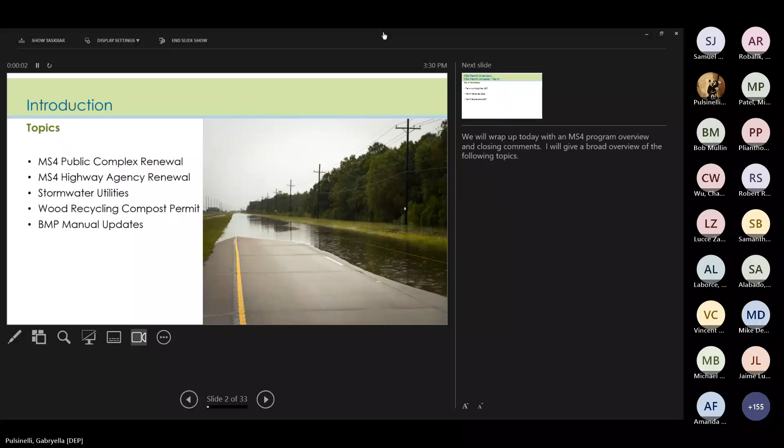Thank you for those, for helping. Sorry for those technical difficulties.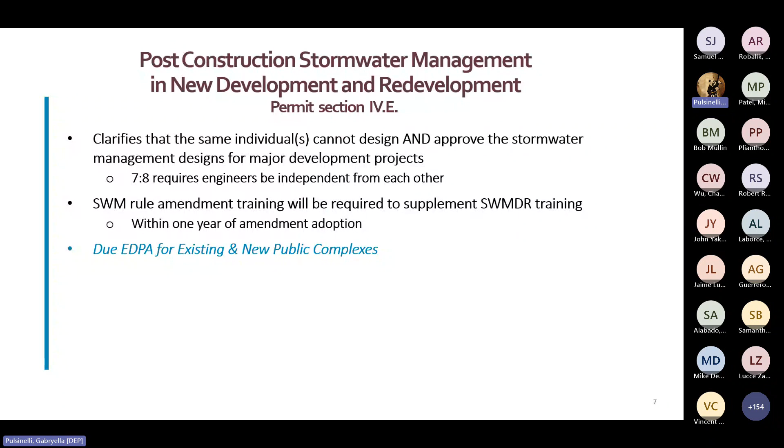There has been no change to labeling inlets. The change here is that all remaining storm drain inlets that have not yet been retrofitted due to utility work or paving projects must be retrofitted by the end of this permit cycle—for the public complex, by December 31st, 2028. The entire structure can be replaced with an updated one, or you may attach a bolt-on plate to reduce the size of the vertical opening of the old inlet.

In addition, all newly installed inlets must have a catch basin or other BMPs to collect solids. We've also included an exemption for catch basins on bridges.

So for the roadside erosion control program, this is a condition that was in the 2004 Tier A permit that was removed in the 2009 permit renewal, and this was also the case for the public complex. The reason is that at the time, it was reviewed as a redundancy since municipalities are required to control erosion under the standards for soil erosion and sediment control in New Jersey.

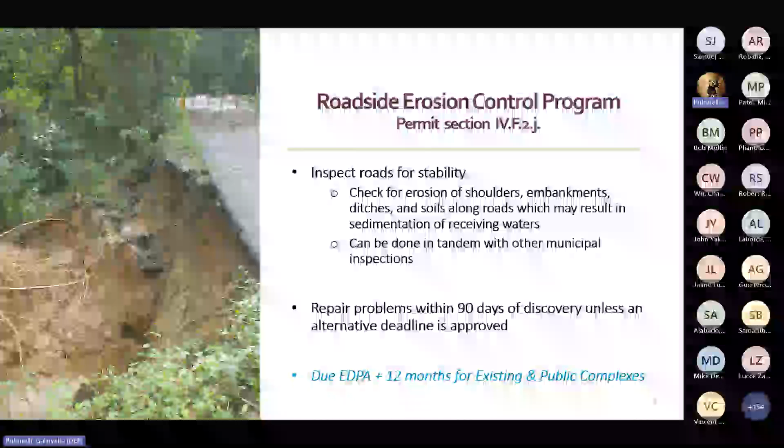Erosion checks can be done while performing other stormwater inspections, so you don't need to schedule additional trips. If problems are identified, we allow 3 months to address it unless another time frame is authorized by the department.

We want to clarify and point out that inlet inspections and catch basin inspections are different activities and have different schedules. The condition of storm drain inlets can be observed with a simple drive-by type of inspection and a quick sweep or shovel if the grate is clogged.

For this reason, we require that all storm drain inlets are inspected every year. Catch basins, on the other hand, require additional work. The inspector must go out of the truck to inspect the inside of the catch basin to determine if cleaning is needed. We ask that catch basins are inspected a minimum of 20% of the total every year on rotation, so that all catch basins are inspected by the end of the permit cycle.

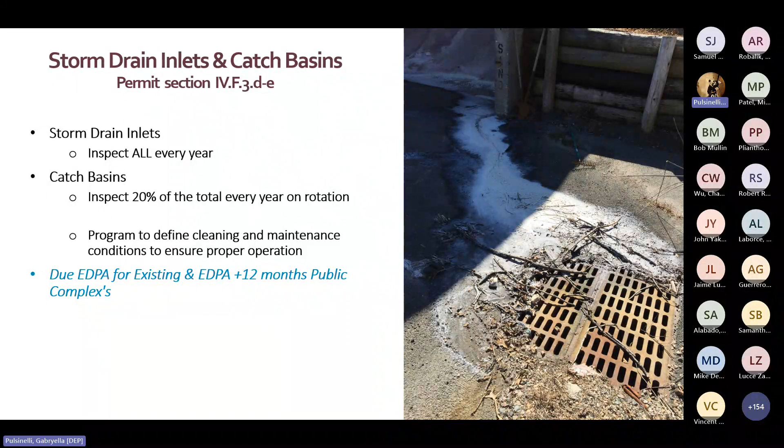So for stormwater infrastructure inspections, we need some clarifications. The clarification is to highlight that the permittee is required to properly inspect, clean, operate, and maintain all stormwater management measures. This is a catch-all condition since it's referring to all remaining stormwater facilities not mentioned specifically in another permit condition, such as stormwater management basins and other MTDs.

This program should define what conditions warrant cleaning, proper operation, and maintenance of any remaining stormwater infrastructure, and establish an inspection schedule tailored to your municipality's characteristics and resources. If there is not an approved maintenance plan, towns can prepare a retroactive maintenance plan for certain infrastructure, or inspect at least 4 times annually and after each rainfall of 1 inch or more. Keep in mind that inspection logs must be maintained for these.

The requirement for illicit discharge detection and elimination inspections has been modified so that all MS4 outfalls are inspected for illicit discharge at least once every 5 years. You must inspect 20% of the total annually on rotation so that all outfalls have been inspected by the end of the 5-year permit cycle. All new or identified outfalls, as well as complaints or reports of illicit discharge, must be inspected within 30 days, and any reports of illicit discharge need to be remediated within 12 months of discovery. These inspections can be done with stream scouring inspections.

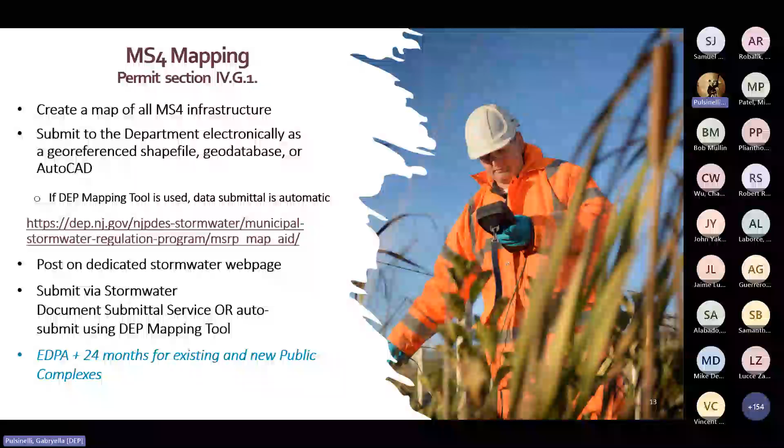As in the Tier A permit, the public complex permit will no longer authorize stormwater discharge from wood chipping or leaf composting activities, as these will need to be covered under the department's new wood waste recycling and leaf compost general permit. I will go over this permit in a couple slides.

Some of these changes that have been made include: scrap tires must be stored in a covered container or enclosure. Inoperable vehicles or equipment can be stored on site for up to 6 months and must be inspected monthly. All containers and dumpsters that are stored outside must be covered at all times to prevent exposure to stormwater. If outside, bulk liquid materials must be stored in secondary containment such as spill containment dikes.

Aggregated material and construction debris can be stored on site for up to 6 months, but no processing activities are authorized under this permit. Cold patch asphalt shall be stored in a permanent structure or covered with a waterproof material on an impervious surface.

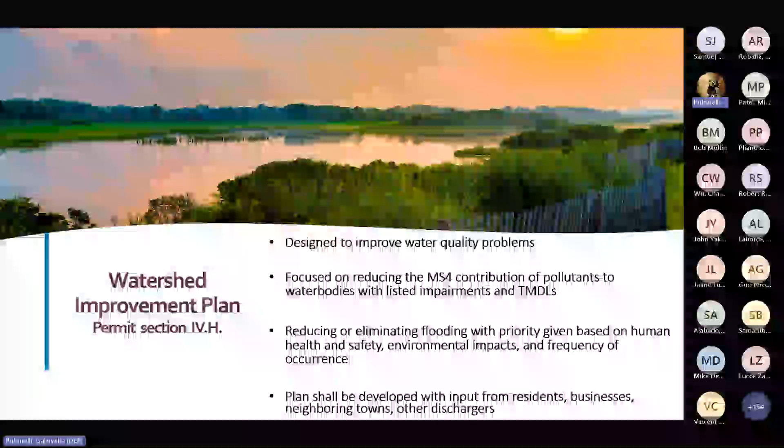There are many water quality impairments resulting in TMDLs that affect waters across our state. Some of these impairments affect fish and aquatic biota, drinking water intakes that supply the water we drink, and even rivers and coastal waters where many of us swim every summer. Harmful algal blooms in many lakes due to water quality impairments are also occurring more frequently in the summer months. Some of these waters have no other discharges into them other than the local MS4.

Therefore, the department requires that each Tier A and public complex develop a watershed improvement plan to determine what improvements can be made to reduce their contribution of pollutants that are causing impairments to the state's waters. The watershed improvement plan is split into 3 phases with separate due dates. It shall be updated when necessary based on the biennial review of revisions to the impairments of the permittee's water bodies, based on the department's integrated report and newly adopted TMDLs.

I want to quickly mention the Stormwater Assistance Grant. While we have gotten most of the applications for this grant, there are a few people who are struggling. So we would like to take this time to mention, if you are one of those towns, please get your application into us. The department has: former Tier B's are eligible to get up to $75,000 in aid, and original Tier A's are eligible to get up to $25,000 for the development of their MS4 infrastructure map. So this grant is only for Tier A's.

This is a reminder that these ordinances need to be completed. We have added 2 additional ordinances to this permit and are providing 2 model ordinances to aid municipalities in this adoption process. The first one is the private salt storage ordinance, requiring owners of private properties and businesses such as malls, shopping centers, and others to properly store salt and other solid de-icing materials. The next one is the tree removal/replacement ordinance, to reduce runoff and promote infiltration. Some towns may have similar tree ordinances, and if their existing tree ordinances meet the minimum permit requirements, the town does not need to adopt our model.

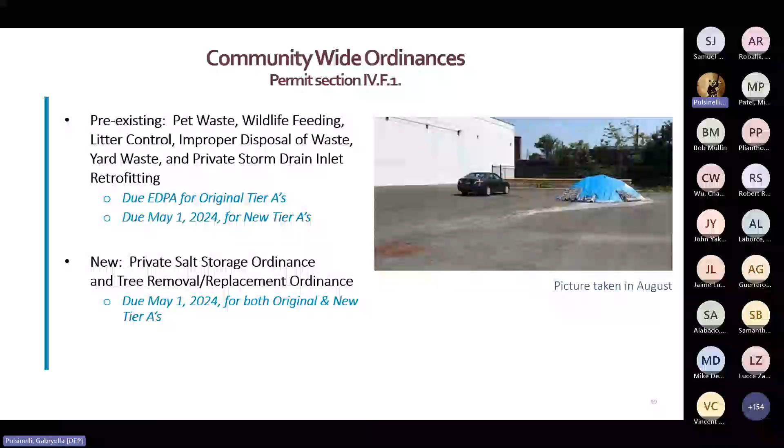In March 2019, the Stormwater Utility Law, officially known as the Clean Stormwater and Flood Reduction Act, was signed into law. This act authorized local and county governments and certain other entities the ability to create stormwater utilities. These allow for fees to be collected to be used for stormwater-related activities. Depending on the unique circumstance in each community, the process to establish a stormwater utility may take up to 5 years or more. There is a lot of information on our website that outlines the steps for establishing a stormwater utility and has many resources on how to do a feasibility study and create a fee structure.

Please reach out to your case manager with any questions about stormwater utilities or if you have interest in creating one.

Here is a list of general categories which the stormwater utilities fees can be used to be paid for. Please refer to the stormwater utility website for more specifics on each category.

So I'm going to discuss the wood waste recycling complex, and I want to describe the background and reason for the creation of this permit. First and most importantly, wood waste recycling and leaf composting are federally regulated industry activities that will need an NJPDES stormwater permit, whether it be the general permit or another stormwater permit.

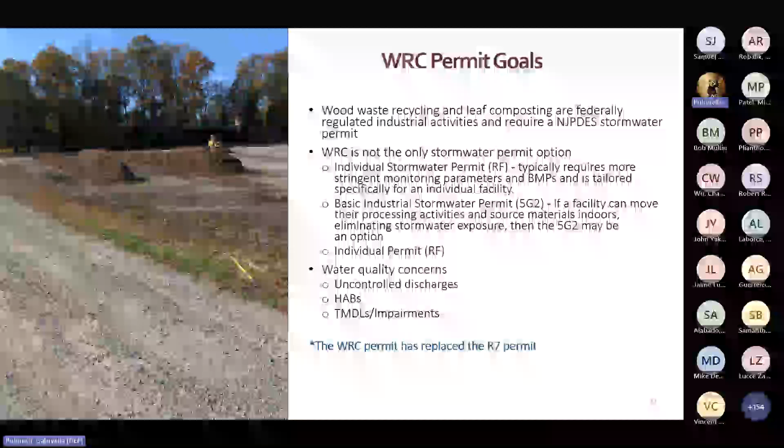If a facility does not wish to obtain a WRC permit, but the industrial activities occurring on site and the source material stored on site are exposed to stormwater, then an individual stormwater permit is required. Individual permits typically have more stringent requirements, including additional BMPs and monitoring parameters. This permit was created to address current gaps in the permit coverage from the wood recyclers general permit, individual permits, and the MS4 Tier A permit.

The department's wood recycling general permit, also known as the R7, expired in 2014, and renewal was needed. This general permit allows the department to include multiple facility types and ensure the proper permit coverage is established for stormwater discharges from wood waste recycling activities statewide.

Specific to municipal facilities, the 2018 Tier A permit only covered the temporary storage of wood waste and yard trimming materials and resulting stormwater discharge to groundwater, and it didn't authorize discharges to surface waters from any processing activities.

Through MS4 compliance audits, we found that municipal facilities that perform these activities were not properly managing their stormwater discharge and therefore contributing pollutants to the surface or groundwater.

Since some facilities are not permitted, they are currently discharging stormwater from these activities with no BMP in place. We also found that many facilities operate without a stormwater permit, including those listed under a solid waste exemption. However, operating under a solid waste exemption does not exempt you from the requirements of the stormwater permits or other programs within the department.

In recent years, there has been a more urgent need for stormwater management measures in order to alleviate water quality concerns statewide. These recycling activities can be contributors of significant amounts of nitrogen and phosphorus. By implementing BMPs at these sites throughout this new permit, we hope to alleviate some of these water quality concerns statewide.

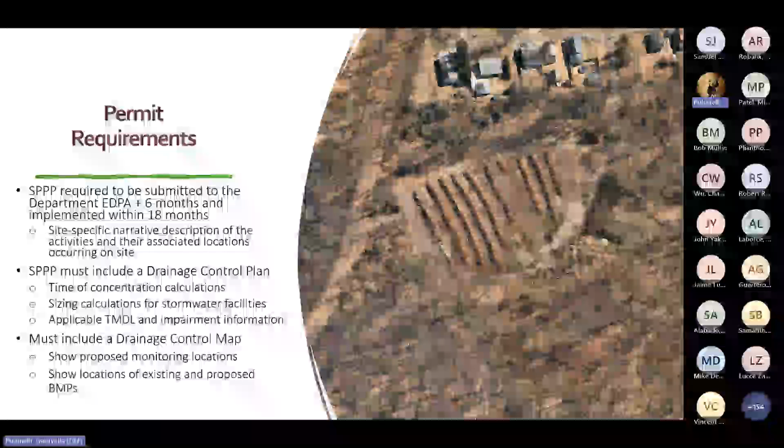The SPPP will require a site-specific narrative description of the activities and the associated locations occurring on the site, and an inventory of source material. It must also include BMPs to eliminate, reduce, or minimize exposure of industrial activity and source material from stormwater discharges to surface water or groundwater.

BMPs also need to be in place for stabilizing surface soils and reducing sediment transportation. There must also be a drainage control plan, and a drainage control map must be included in the SPPP.

The narrative portion of the drainage control plan shall include times of concentration calculations, sizing calculations for stormwater facilities, and applicable TMDLs and impairment information.

The SPPP shall be retained at the facility for use by the permittee and for inspection by the department. Additionally, the SPPP shall be made available to the public upon request. We also want to note that this list is not inclusive of all the SPPP requirements, but these are just some of the main components.

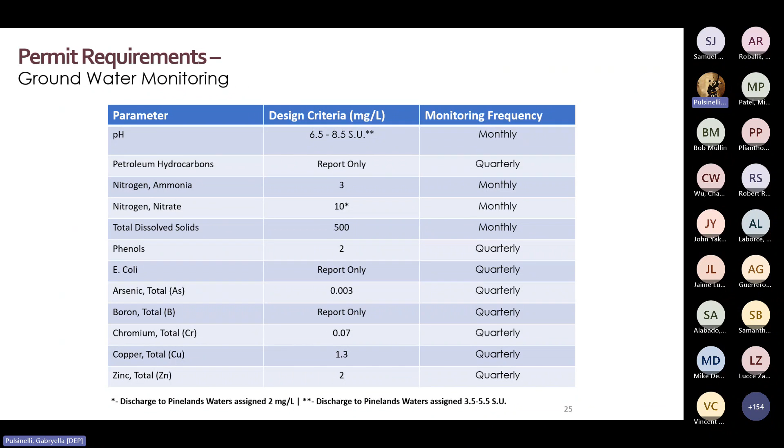Storm event parameters should be recorded every time a stormwater sample is taken, whether monthly or a quarterly sample. Samples should be taken within 30 minutes from when stormwater begins to discharge from each monitoring location.

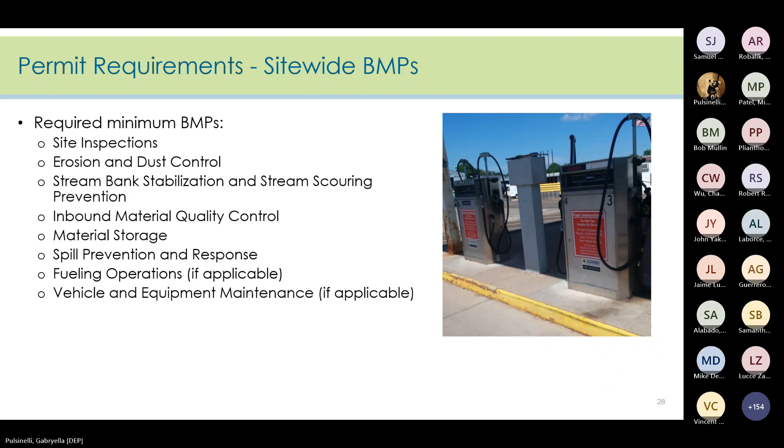As well, you can get any information for any of the permits on our NJDEP Stormwater website. And if you have questions about the MS4 program, you can find those on the MS4 website.